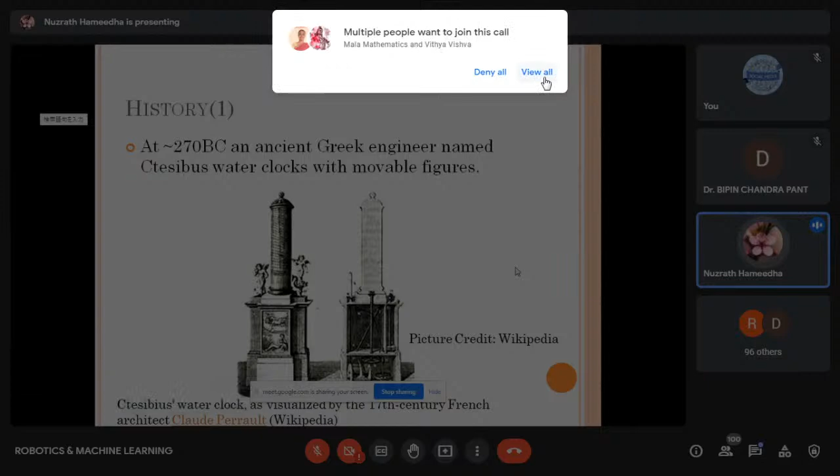Ctesibius was said to be a barber, and his first invention was said to be an adjustable mirror for his barber shop. Just imagine, after all these years, we are talking about his inventions, and he was a barber at first.

Next, there was a Muslim inventor called Al-Jazari during the Artuqid dynasty, who designed and constructed a number of automatic machines, including kitchen appliances and musical automata powered by water.

This picture depicts the musical automata powered by water. It was used to entertain royal guests during parties, and was designed so that when the pegs of the drums hit the drum at different places, it produced different tones. It was considered one of the best musical automata in the world.

When talking about engineering and automation, we can't deny the contributions of Leonardo da Vinci. This is the model developed from the notebook recovered around the 1950s. It was said that Leonardo da Vinci drew the setup around the 1490s.

And so here we are with Japan. Around the 17th to 19th century, mechanized puppets were very famous in Japan, mainly the karakuri ningyo. Ningyo means doll in Japanese, and karakuri is thought to come from karakuru, meaning to pull, stretch, and move a thread. So by pulling, stretching, and moving a thread, we make the doll act however we want. It was a mechanical puppet designed in 18th century Japan.

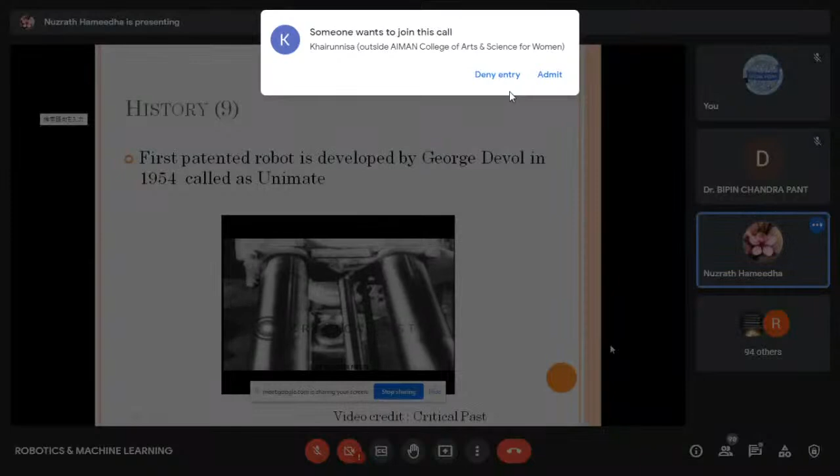Here you can see the Unimate. It is an immobile robot, programmed to do a particular set of tasks. It has hands and it can hold objects and move them from one place to another, which was surprisingly odd at that time. It was a very high technological development for its time, around 1954, roughly 70 years back.

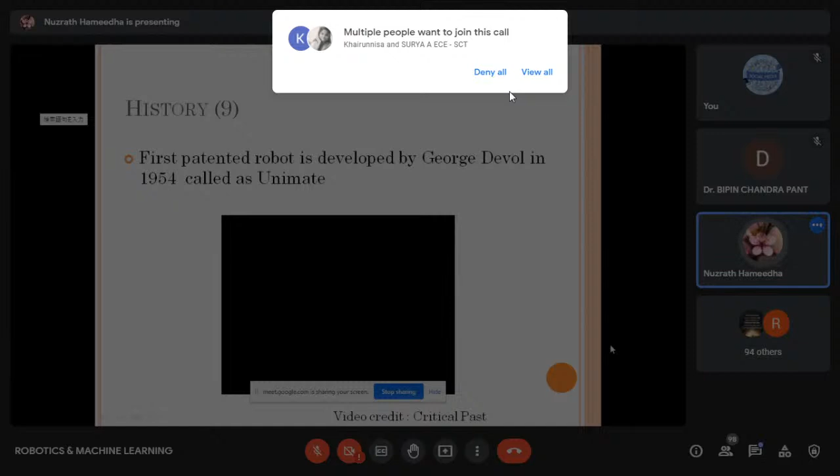So that is the Unimate. That was the first patented robot system. It was developed by George Devol.

So when you consider modern robotics, what are the expectations we have from the robot? We have numerical control. We saw the example of numerical control in robotics as the Unimate, and nowadays we expect it to be self-programmed, autonomous, and able to be controlled remotely.

The second expectation is that it should be able to work in dynamic environments. It should be designed and controlled to work in dynamic environments, with high mobility and intelligence. What is a robot without mobility nowadays? With artificial intelligence and so many algorithms for navigation, these are our expectations.

A robot should be flexible. So what do you mean by flexibility? If we want to create a robot that depicts human arm movement, it should be able to move its hand as flexibly as a human. There are many processes involved again—algorithms, actuators. It's a combination of mechanical and computer engineering and other things: sensors, images, and electronics.

When we want the robot to work in a dynamic environment, we want human-like action in that environment. A dynamic environment could mean a plain surface or one with stones and obstacles. We humans have eyes—with our eyes we see and move away from obstacles and follow a path. So what about robots? The robot needs different kinds of sensors: image sensor, motion sensor, and proximity sensor.

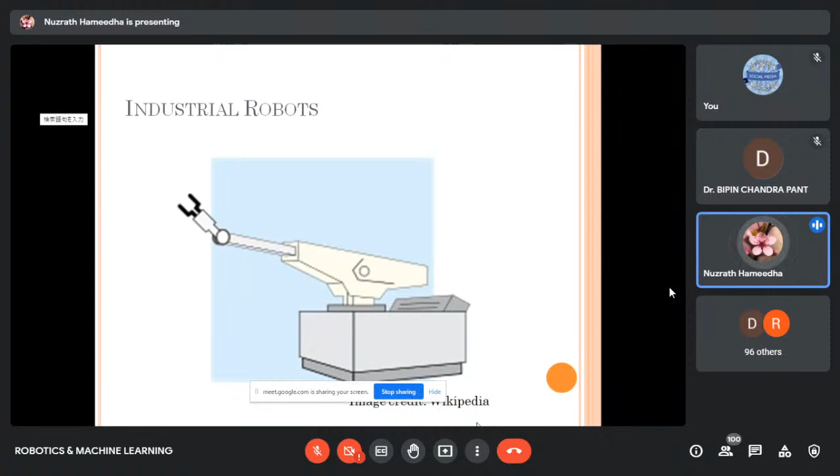Industrial robots, as the name specifies, are mainly used in industries. This is a picture of the Unimate that we have just seen. This was the first one. At that time, Unimate was considered so powerful, a very much new, powerful technology. Let's see how things have progressed.

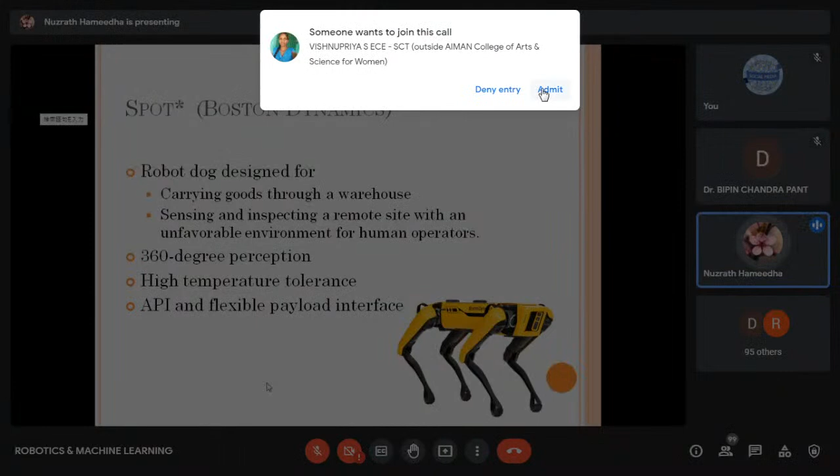First one is Spot. Spot is a robot dog designed by Boston Dynamics, designed for carrying goods through a warehouse, sensing and inspecting a remote site with an unfavorable environment for human operators. Consider some nuclear reactor accident, like the Fukushima incident in Japan in 2011, where humans cannot enter the place where the accident took place. So just to see what is happening there, we need some kind of intelligent thing to assess the area. For that kind of area, Spot is a better robot to be deployed. It has 360-degree perception, high temperature tolerance, and an API with flexible payload interface.

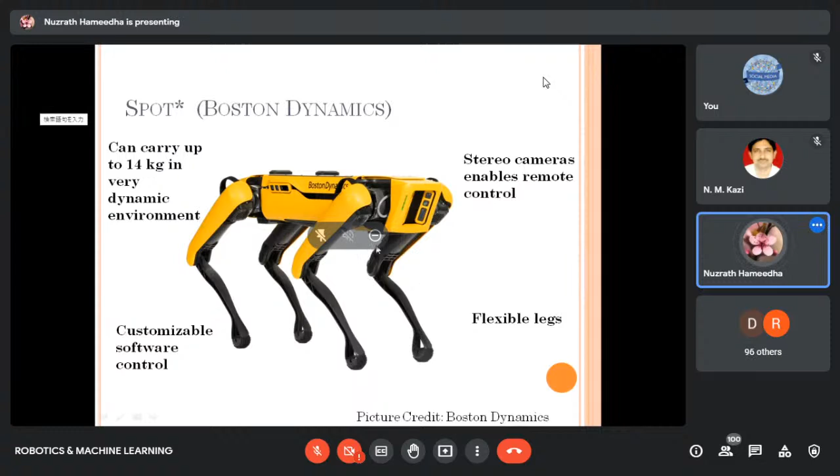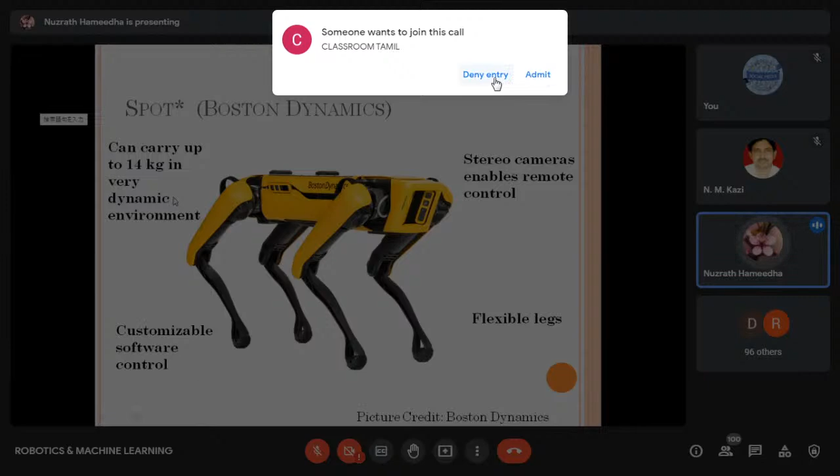It has stereo cameras that enable remote control. Spot can be pre-programmed or controlled remotely. See the legs - they are very flexible, similar to a dog, and it can move in different kinds of dynamic environments with legs like this. It has customizable software control and can carry up to 14 kilograms in a very dynamic environment.

Next one I would like to introduce is Aquanaut, developed by Houston Mechatronics. It is an advanced unmanned underwater transformer. We have seen Spot, which can work on land, and this one works in water. It can transform itself from a long distance submarine into a half humanoid robot. It can do complex underwater manipulation tasks, and it is used to inspect subsea oil and gas infrastructure, operate valves, and use subsea tools with just a few mouse clicks.

It has a maximum operational depth of 984 feet. Just imagine there was some oil leak deep into the depths of the ocean - we can deploy Aquanaut to go and repair that. Just to say why it is called a transformer: if you have seen the film Transformers, you know the car can be transformed into a robot. It's somewhat similar. Let's see how it transforms itself.

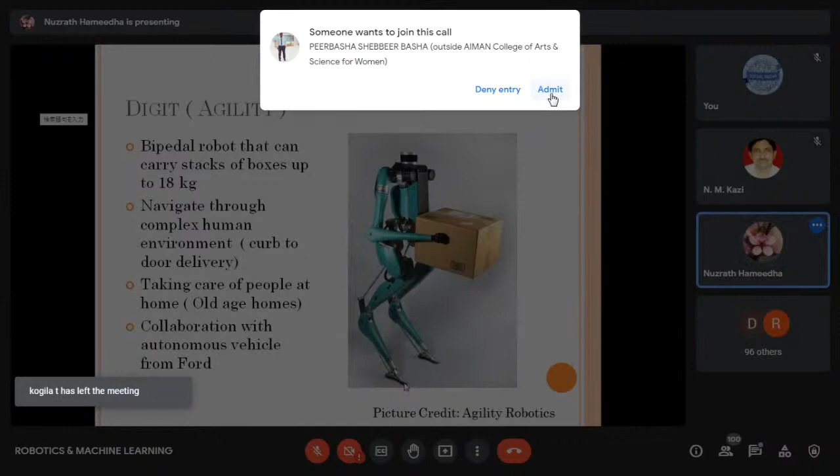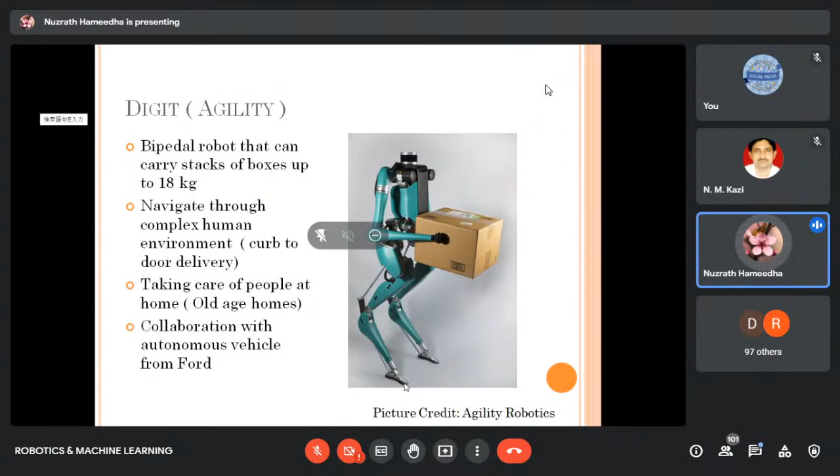It can also be used for taking care of people at home. Currently, Agility has a collaboration with Ford. Just imagine there is some delivery coming for you from an Amazon warehouse. From the warehouse to the home, Ford's autonomous vehicle will carry the parcel, and once it's at home, Agility Robotics' Digit can carry the parcel to your doorstep. Such kind of collaboration or progress.

Atlas is one of the best dynamic humanoids in the world. It has very high power, advanced control systems, algorithms that facilitate complex locomotion, and predictive and real-time perception models. This is one of the best dynamic humanoid robots.

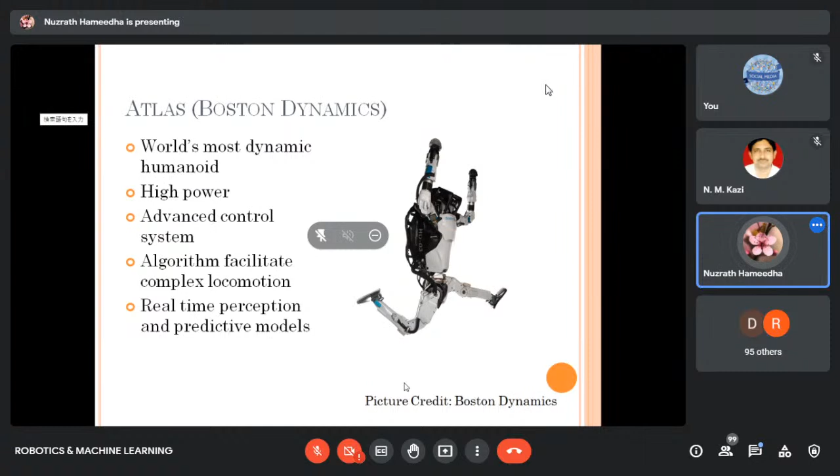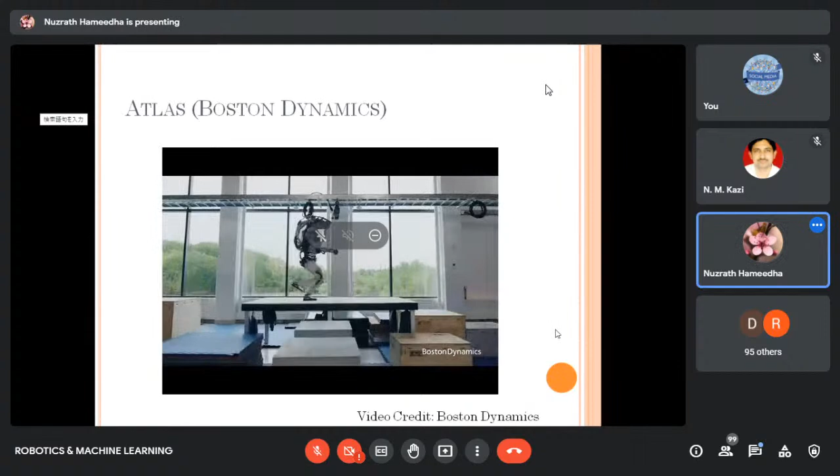I have a video for you. I can say so many things and explain things, but if you see the video, you will understand how dynamic this robot is. Again, it doesn't have audio, but just see how—I don't even think I can do these things.

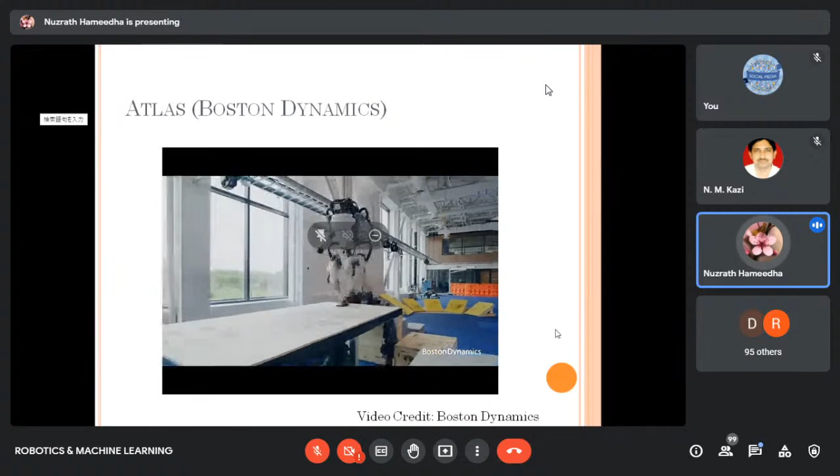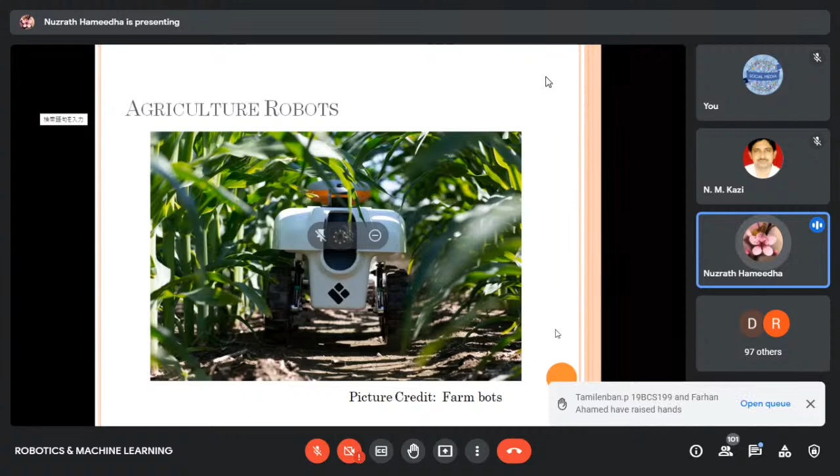The next one is agricultural robots. Agriculture is what gives us everything—food, clothes, and everything. So incorporating robots in agriculture to reduce manual labor is very useful nowadays. I have a few selections of agriculture robots.

This is called the Autonomous Weeder, developed by Carbon Robotics. This autonomous weeder is very helpful for weeding. Just imagine you have a garden and you've just planted some seeds, and there come unnecessary plants called weeds. If our garden is smaller, we can do the manual work, but what about if we have acres and acres of land and need to weed? We can use the autonomous weeder.

The autonomous weeder uses machine learning to identify the weeds and uses laser technology to kill them. It patrols every night, identifies the weeds, and destroys them. It is said to have the capability to treat around 100,000 weeds per hour with 8 laser modules.

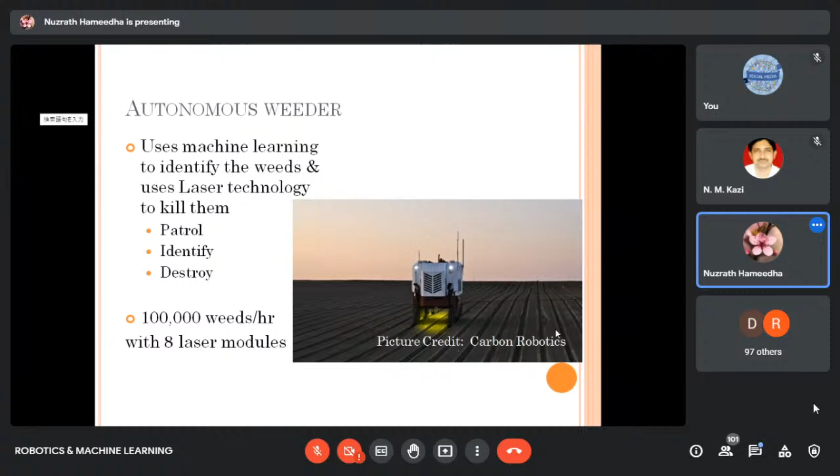The next one is the apple picking robot, developed by Australia's Monash University Department of Mechanical and Aerospace Engineering. It has a hand that picks the ripe apples, with sensors and image processing algorithms to do that. We know a robot's hands may harm the apple, but these have a sponge-like structure so that it carefully picks the apple and gathers it. This is very helpful when you have acres and acres of land, for reducing manual labor.

The next one is domestic robots. These are used to help with day-to-day activities, rehabilitation, cleaning, cooking—there is even a cooking robot. Let's see what we have in domestic robots.

The first one is Bot Handy, designed by Samsung Robotics. It is a home care robot with AI. It recognizes and interacts with you—if you're looking at your phone and scrolling through social media for 2 or 3 hours, it will ask you to stop. It has that kind of artificial intelligence. It just sees you and watches you, and it will wake you up. It has an alarm section and interacts with you.

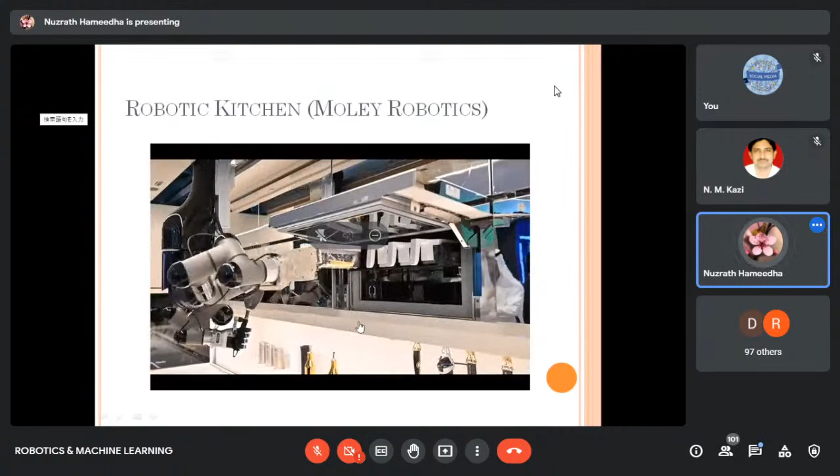So this is the first one. This is like a complete setup. It has hands, it has a particular area for the ladles and other things. We just need to cut and put it in the particular place, so it will cook clean. It has sensors. Here you are entering what should be done at what time - this for breakfast, this for dinner. It was said to be able to use a blender too. So here it's making rice, pasta, and Alfredo.

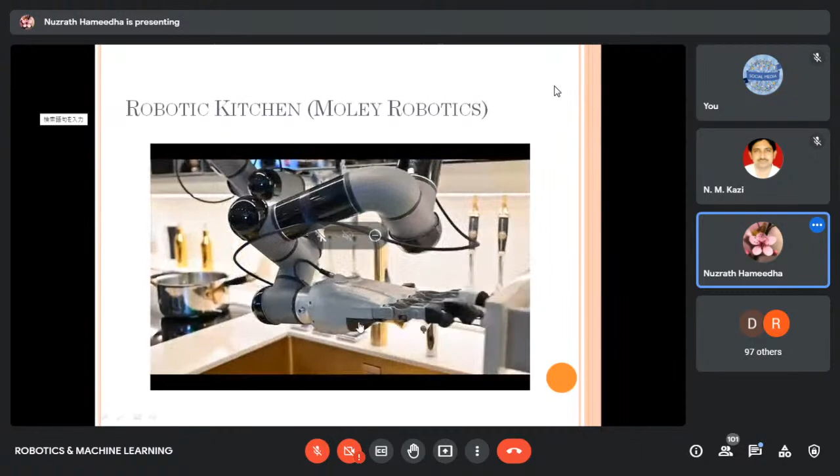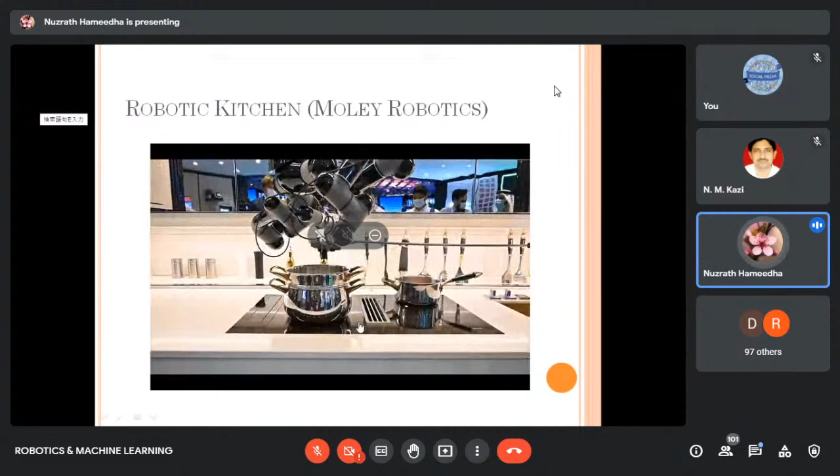But it was said to cost around $700,000. But we can hope - when the cell phone was first invented, it cost a lot more too, right? But now everyone has cell phones, so someday this may become a norm in every other household.

So the final one is remotely controlled robots. These are robots which you can control from a faraway place. Just imagine there is a robot in India and I'm in Japan. Here they have used virtual reality - with virtual reality you can make the robots move and do whatever you want them to do. This robot was developed by Massachusetts Institute of Technology, Boston, and they used a virtual headset and virtual reality to remotely control the robot.

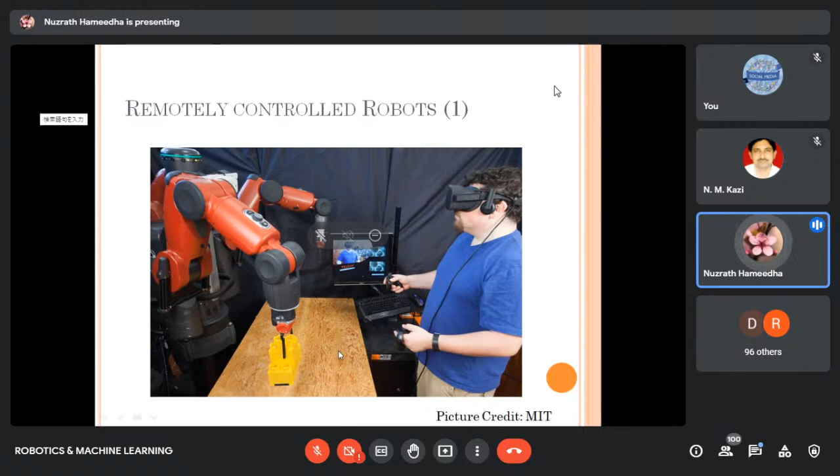The first one is the Reachy. Reachy is developed by a French robotics company called Pollen Robotics. It's similar to what we saw in the previous slide, but Reachy just has a torso - it doesn't have legs, it just moves with wheels. And again, they have used virtual reality technology.

You can have this robot at home, and if you forget - just imagine you forgot to switch off the stove, I do that so many times - if there's a Reachy at your home, and you have the virtual reality headset and hand controls, you can make Reachy reach the stove and stop it. Just imagine how beneficial that can be. It can be helpful domestically, and it has both domestic and industrial applications.

Next one is tele-existence robots. This is similar to the Reachy, but recently they had a trial run for a tele-existence robot in a convenience store in Japan called Family Mart. Without further explanation, let me show the video of how it's done. Obviously there are so many algorithms, programming, and so much testing and trial and error to get to this level. So this is the convenience store, and this guy is at his lab.

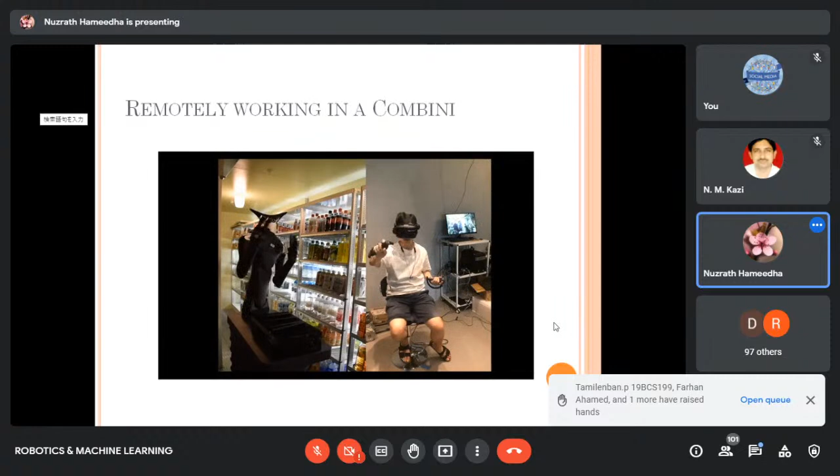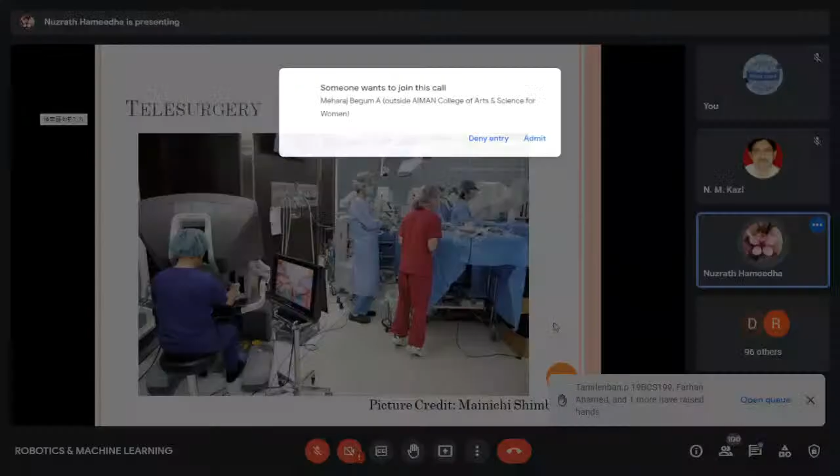And the final one, which is very much needed but crucial to consider, is telesurgery. We've seen robots in domestic and industrial settings so far, but what about medical settings? This is a picture depicted in Mainichi Shimbun, a newspaper in Japan, showing a doctor doing surgery on a patient remotely. Here they are very near, but this is a first step toward something like a doctor from the US doing surgery on a patient in Japan - imagine a very emergency situation where we need to operate within an hour and the surgeon is in the US. We can use telesurgery for that.

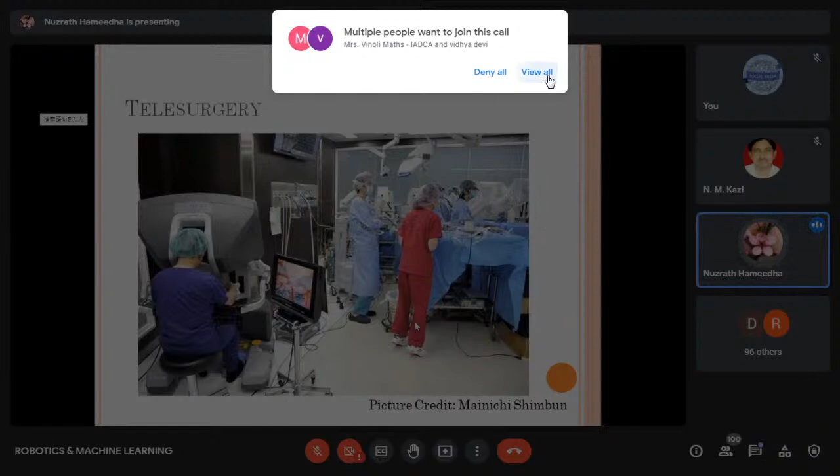This is still in development progress - this is about life, so it's still in progress. The main thing to consider is the sense of touch. Usually, before making an incision, a surgeon will touch and feel, and then make the incision. So the technology called haptic technology comes into play here. Haptic technology is nothing but the sense of touch - you can perceive the sense of touching a different texture using haptic technology, which is facilitated by perceiving the force experienced.

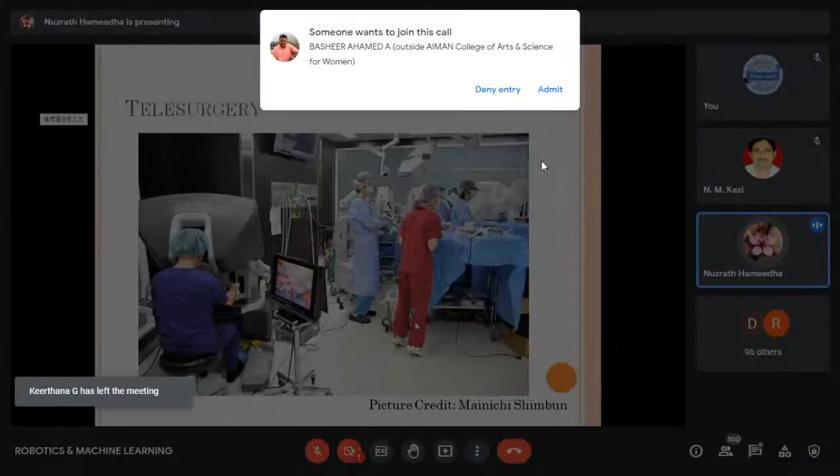Just to explain the force being perceived, consider two balls: one made of sponge, the other a basketball. If you press a sponge ball, the force you perceive is completely different from the force from a basketball. Or in simpler terms, imagine cake and wood. Cake will be very spongy, but if you touch wood, you can feel the difference. That can be modeled into a machine, and that sense is called the sense of touch, or haptic technology.

Haptic technology plays a major role in telesurgery. Even in India, at IIT Madras, we have a touch lab that has a collaboration with Massachusetts Institute of Technology, and the professor there did his postdoc from MIT Boston.

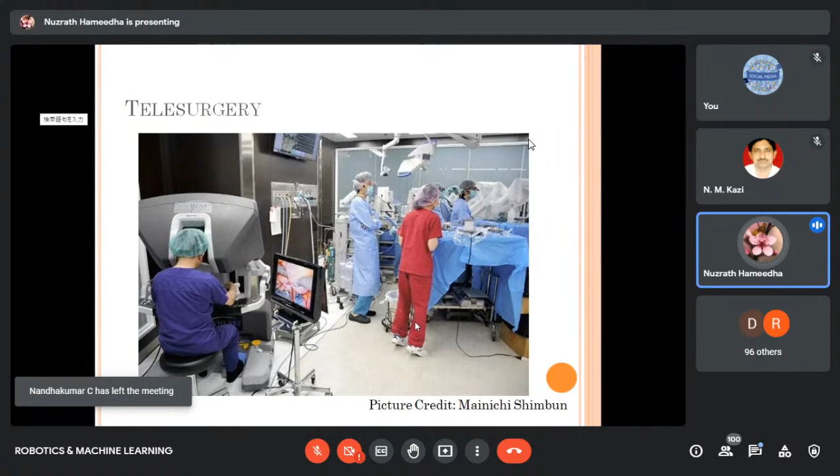They are trying to replicate Varma Kalai, which is like a sense of touch. You have to touch and take out the knots - that is Varma Kalai. So they are also doing research instead of just Western medicine, it's like our own Indian medicine kind.

So this is about telesurgery. And the final one, more like a drone and a robot combined, these are insect-like robots. You can see there are four insect-like things with wings, each around 5 centimeters, less than 5 centimeters. It can navigate itself, and if it collides with something, it can get up easily.

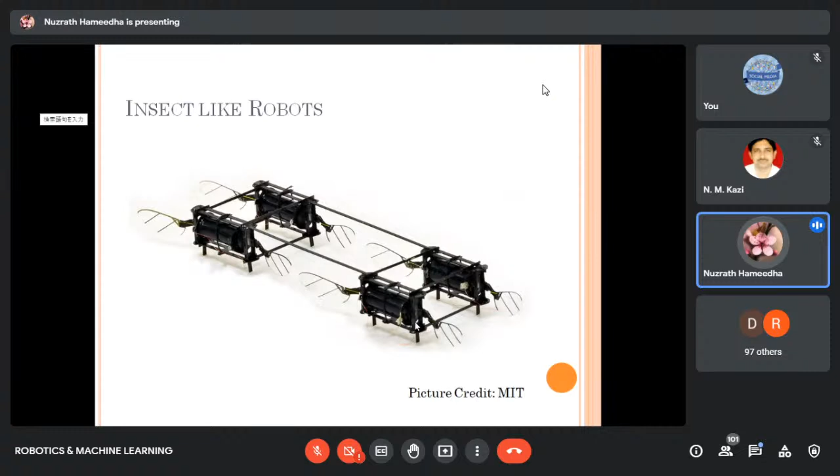This is developed by MIT Boston, and this is how this works. It has subtitles, so I think it's self-explanatory. This is how small it is, around 5 centimeters.

So when pushed down, it just gets up, and it can also do a somersault. As I said, it's very small, like a bumblebee.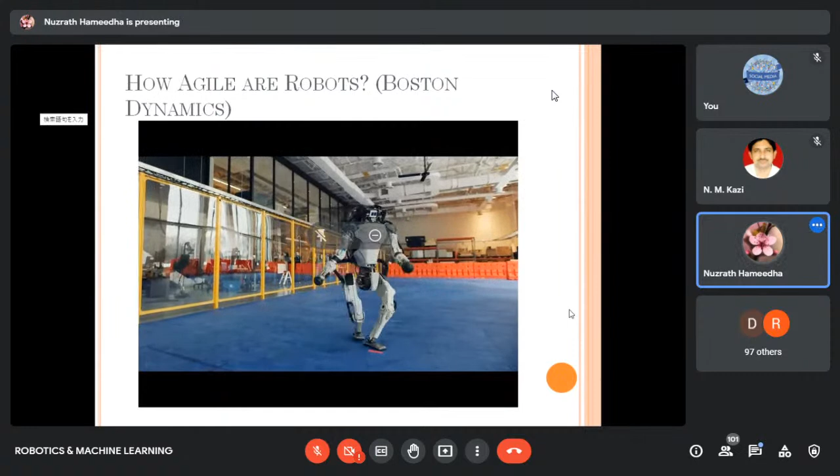Atlas will be joined by Spot. You can see how we have developed from an Unimate to Atlas and Spot in 70 years. This is the work of different engineers, programmers, and data analysts. That's why it is called the most agile robot.

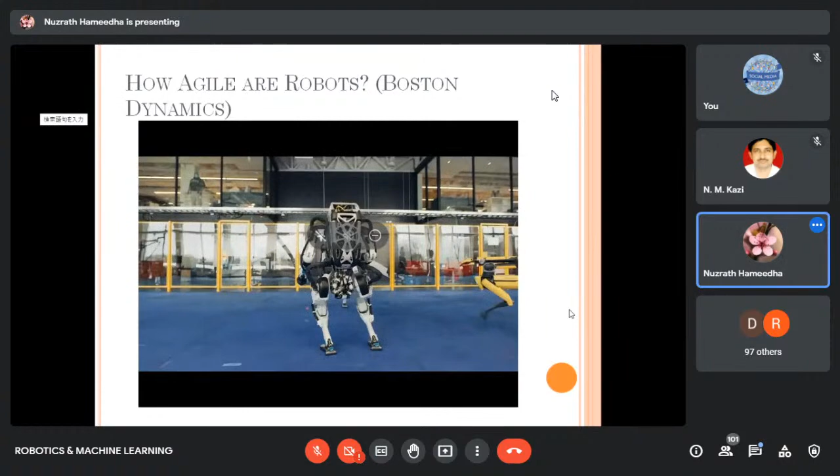It's most probably replicating a human - it was programmed to do so. We study C, C++, and every other programming language to say hello world, but we can also do these things.

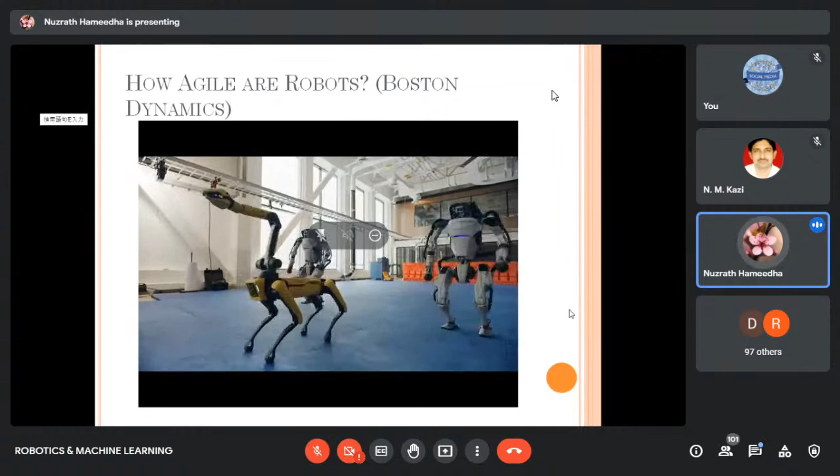Just see how dynamic the movements of Spot are - it's like seeing an animated picture of the dog dancing. Spot also has an external payload, the hand here.

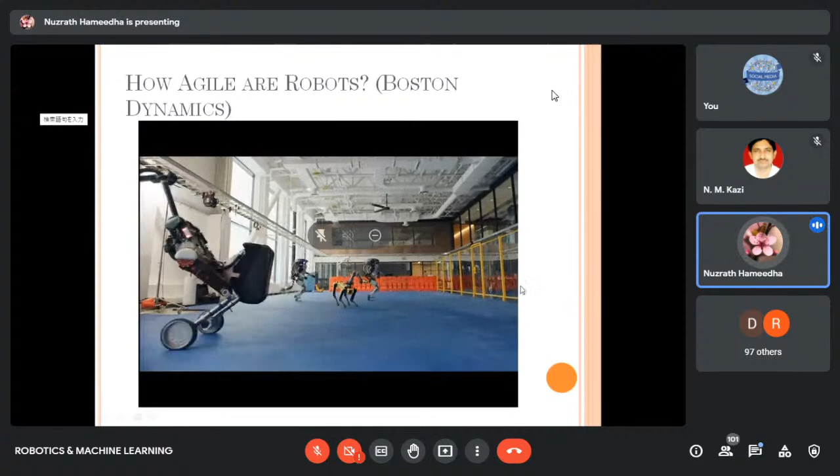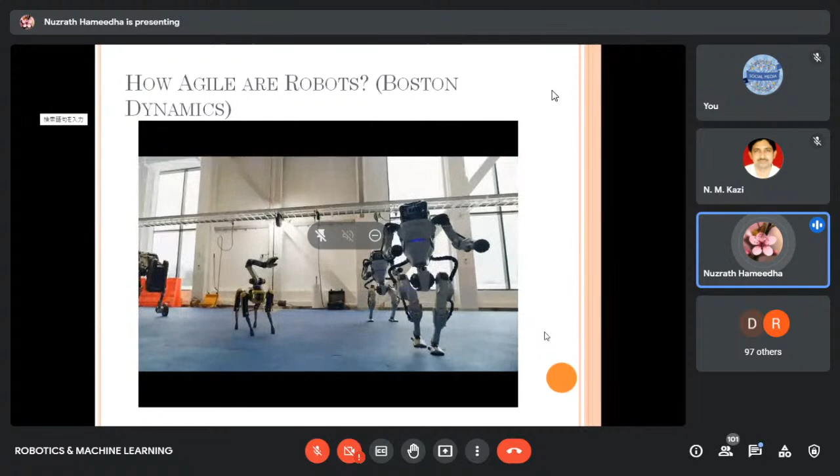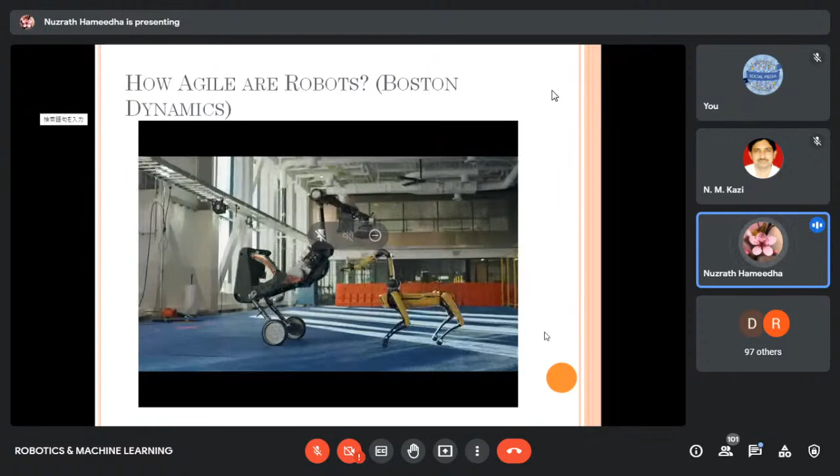I mean, I can't do that, most of us can't, right? The stability it requires in the algorithms, the different kinds of data, and the number of trials they must have done to accomplish this kind of technology is astonishing.

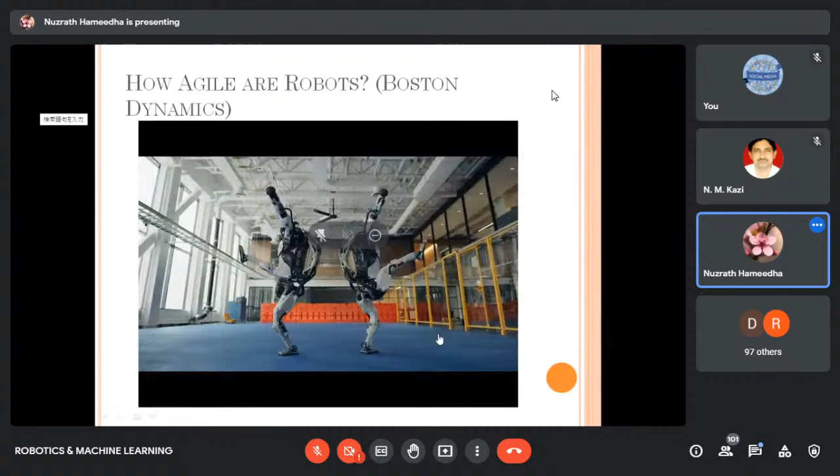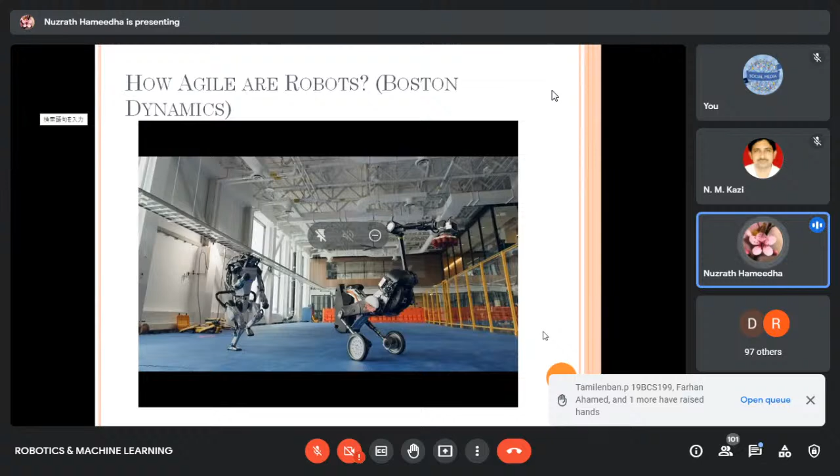Yeah, so this is how robotics have emerged in these recent years. Thank you. Thank you so much.